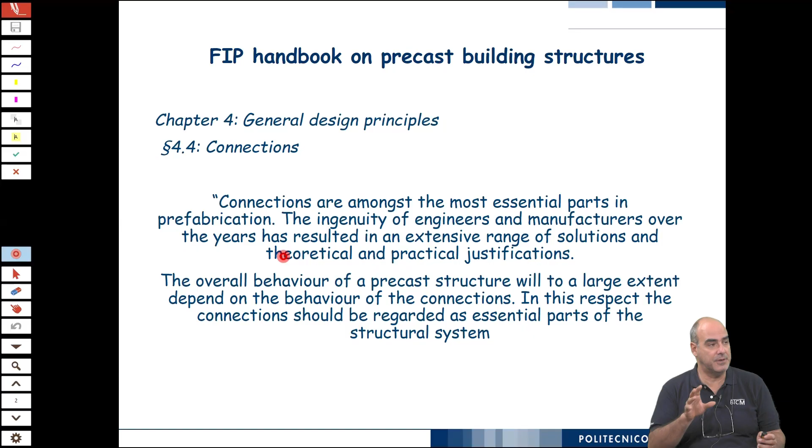The important thing is that the overall behavior of a precast structure, as you design it, depends on the effectiveness of implementing the assumptions in the transfer of forces between the elements through your connections.

So which are the functions of connections in precast building structures? First of all, they connect the units to the bearing structure: the slabs among themselves, the slab to the beams to the columns, the slabs to the cores or to the shear walls, and so on.

They secure and guarantee the intended behavior. So if we assume a diaphragm behavior of the floors, the connections have to guarantee it. If we assume a fixed edge at the bottom for the column, the connections have to guarantee it. And in order to do this, they have to transfer the forces from the point of application to the stabilizing structures.

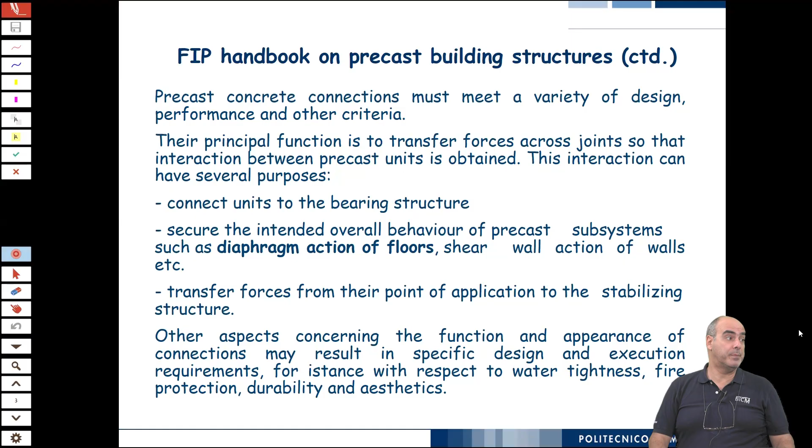Then you also have other aspects: function, so the connection must allow a deformation. Appearance - if you see a rusted connection, what are you feeling? That there is some kind of bad design, bad execution, whatever. Also water tightness - sometimes through joints the water seeps through. Fire protection, fire resistance, durability.

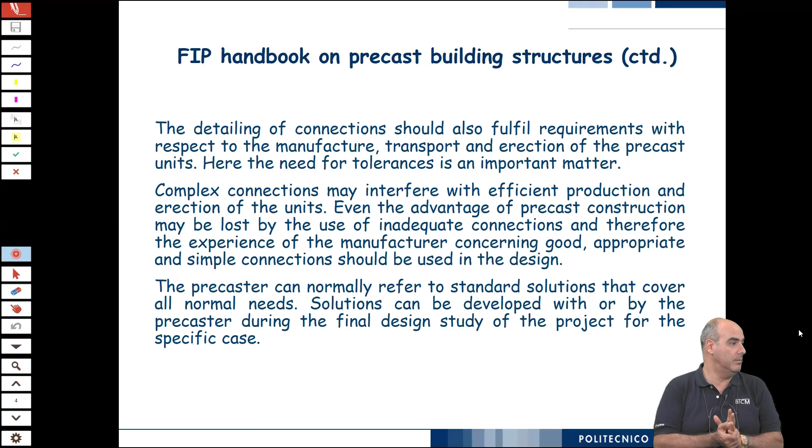One thing we have to take into account, and we will see some examples of very strange connections, is that connections must be manufactured and must then in some way be inserted or connected to the elements. For this reason they must be simple, also considering the tolerances.

But as we said yesterday, when we talk about connections, it's not only the piece of steel which joins two elements together. It's the complex mechanism of transfer of forces in the adjoining zones of the elements that you have to consider. So a connection, broadly speaking, consists of three parts: the connecting device and the two end zones of the elements - if there are two, can be even more - that are connected.

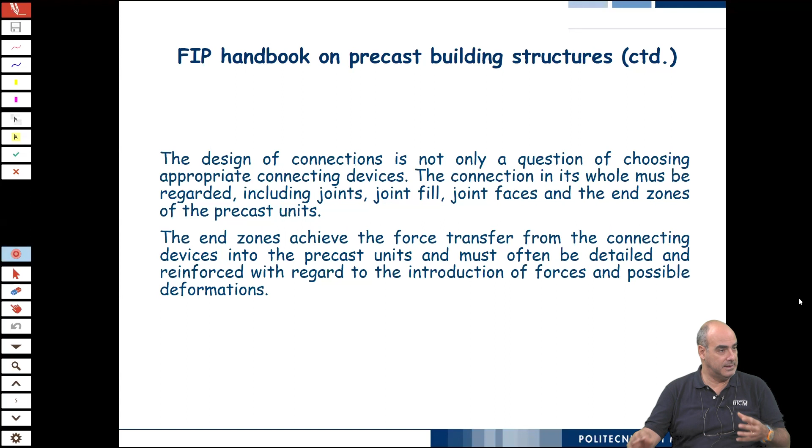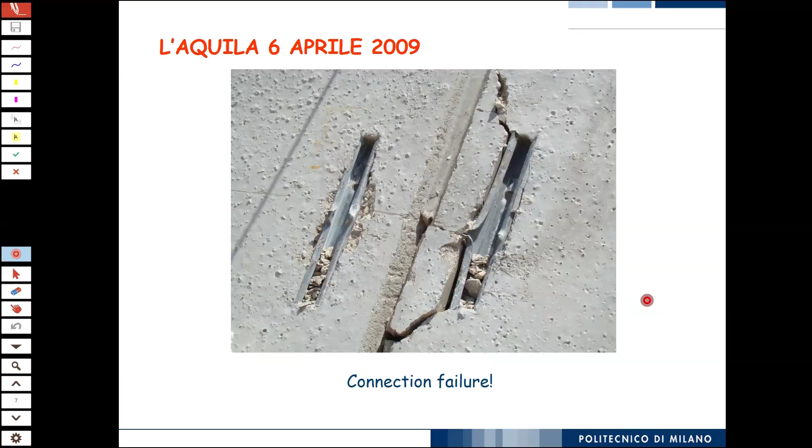You see that it was really torn up by this out-of-plane movement. These highlights show this other part of the connection, which went under tension and was broken because of the excessive demand. So this really highlights the importance of the connections.

Actually, where is this building? This building stood, and there was no issue with the behavior of the building itself. All the problem was in the connection. Luckily in this case, the damage was only economic, because you had to replace the panels and so on.

But can you imagine if that happened during the day, in what was like a warehouse, with forklifts bringing freight back and forth and people passing by? It could have been much worse. Here are some other images of the connections.

Generally the adjacent panels are not connected to each other. They are shaped with some kind of geometrical details and simply joined to each other. There is no connection between them. Because if you put a connection, that is a good question.

Thank you for asking. Connecting them gives a very strong stiffness contribution, as large as the wall itself. Whereas if you do not connect them, you allow the single panels to rock a little bit, which helps in controlling the response. Otherwise the structure becomes very stiff.

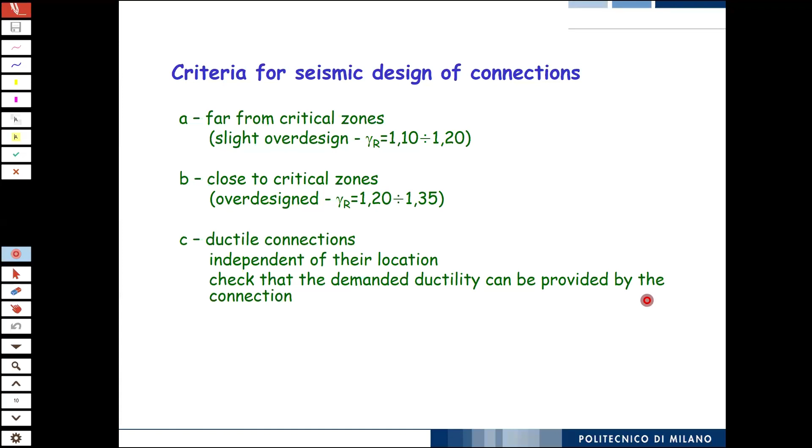Now, we have two philosophies for accomplishing this: wet joints, or emulative connections.

Design and construct your building structure in such a way that you restore a cast-in-place situation, not considering this. Then you have dry connections.

For teaching purposes, let's imagine a building to figure out how many types of connections I have, because each has to perform different functions. I can have the roof element or the floor elements, and I have to connect them mutually to each other. That's the first level of connections. Then I have to connect the floor or roof elements to the beams, to the columns.

If you have a multi-story building, it can happen that your column comes in segments. If you have a 20-meter high building, you don't cast a 20-meter high column—it would be unpractical to transport and to lift. So you cast in segments, and then you have to decide where to join them, and we have seen some examples: joints between the column and the foundations.

These are really the ones about which we know least: fastenings of cladding panels to the bearing structures. Why do we know least? Because we make the assumption that the cladding panels are non-structural. While we design for earthquake, we consider part of their mass participating in the earthquake motion, but we don't consider them in the overall behavior. And this is a big mistake. This is a big mistake.

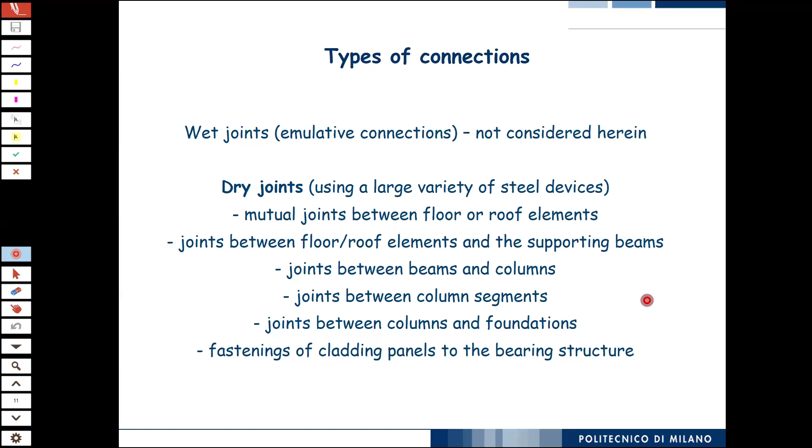But still, it's a topic of applied research—it's very important. So what is the function of these connections? Mutual joints between floor and roof elements: they secure the diaphragm action. When you have a diaphragm, you must guarantee, you must provide peripheral confinement.

It's easy in cast-in-place structures because you put reinforcement and you cast a peripheral beam. In precast structures, you do not have that, so everything is demanded to the connections.

Joints between beam and columns—these are also most delicate, because when we design our structure, we think of planar schemes. So we say, okay, what does a joint between a beam and the column have to do? It has to transmit vertical forces, and vertical forces you transmit by contact.

But when earthquake comes, lateral movement comes. So never rely upon contact and friction. Always provide a dowel. In the late 90s of last century in Turkey, Kocaeli, there was a strong earthquake.

In precast structures where there was no pin connection between the column and the beam, you could really see that the columns were standing and the beam collapsed because it lost its support, due to this motion. You can also have some jumping of the beam on the column, but at a certain point, because of this movement, the beam really loses its support. There was no cracking, no yielding of steel, nothing—the beam collapsed as a rigid body because it lost its support.

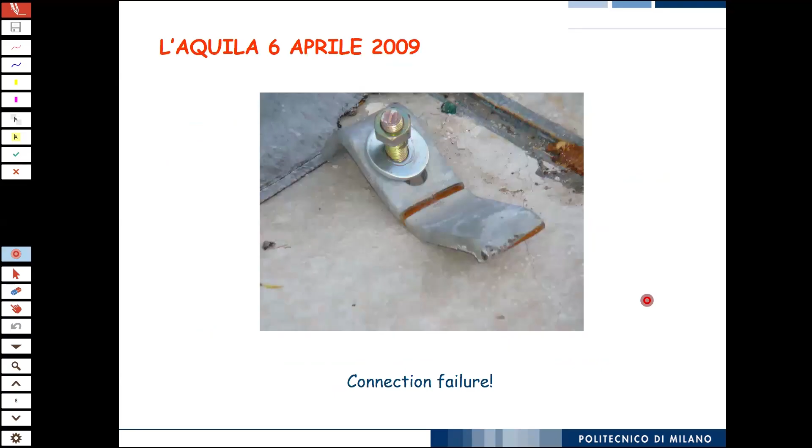Let's go back to this building. My panels do not participate in the earthquake response. What you have to allow is that your connection must permit a relative movement between the frames, which are quite flexible—you see how slender they are. This is also the benefit of precast structure, because they have a high period and so a lower inertial force. But if the frame has to behave as such, it will have large deformation.

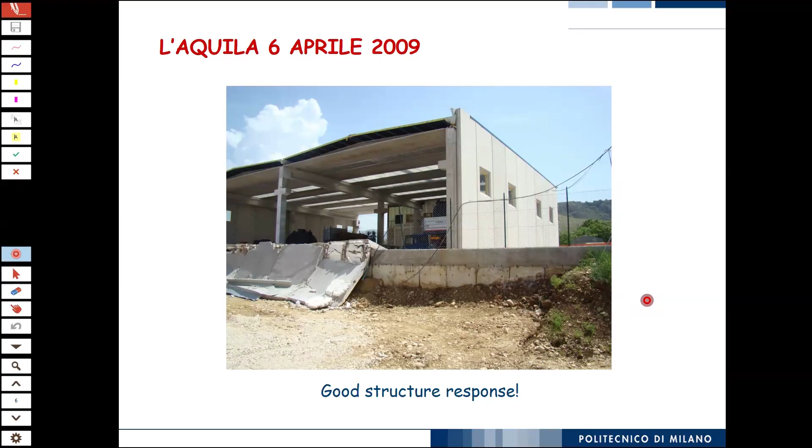So these connections have to allow the panel to stand and the frame to move. They have to allow strong relative movements, which is easy in this direction, but not so easy in this other direction, because in that case they have to function first as a tie and then as a pushback. That is also the technological challenge.

About the joints between beam and columns, there is another thing. As I was saying, we consider planar schemes, but in reality a structure is a 3D assembly. So you have to support the beam in its own plane, but you also have to avoid the beam tilting in the out-of-plane direction.

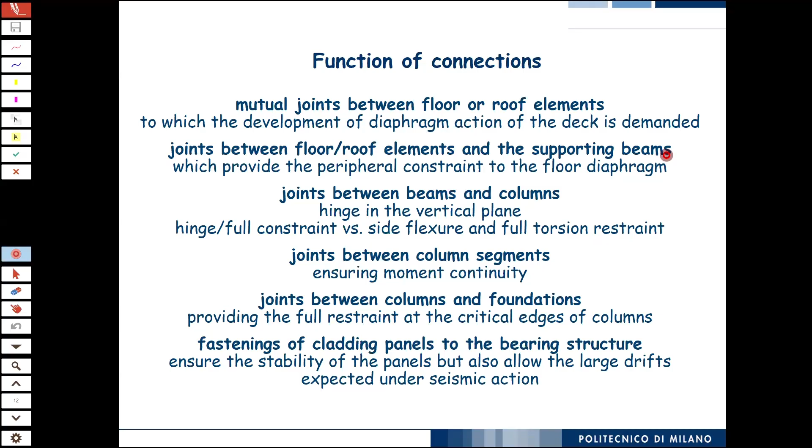So the hinge, if it is a hinge, must work in two directions. And it has also to provide some kind of torsional restraint, because this is something that you can expect. So these are some schemes of how the connections function.

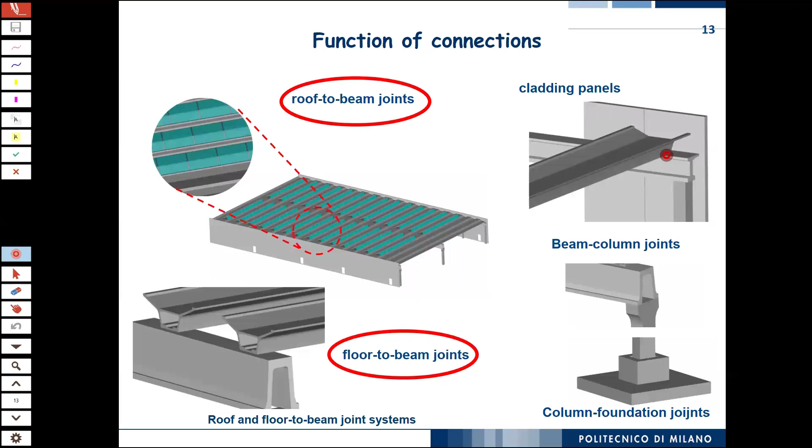But now we will see some examples. For example, let's start from the top: mutual joints between floor and roof elements.

These slides come from a survey that we made around 2010. We interviewed about 40 to 50 precasters in Italy and asked them, for these 6 types of connections, to give us a maximum number of examples of the most common devices that they use. We ended up with hundreds of them.

So there isn't a specific standard, and this work was intended also to say: there is a protocol for which you have to at least verify. The only thing is that you can design it. Then if you design simply by hand calculation, by finite element model, or by testing, there is no mandatory prescription, but we try to come up with a protocol, especially for seismic regions.

We prescribe 3 cycles at increasing amplitude and so on. But you see, this was a company which produced this kind of element. If you have your specific element, each company has its own signature one. You have to come up with a connection which actually can more or less work only for this.

You see, what did they do? Well, they used 2 bolts. Post-inserted, generally you leave a sleeve or a hole because it will be difficult, once installed on top of the building, to drill the hole. So you must leave the sleeve, you must pre-insert the sleeve, and then you put the bolt through the hole.

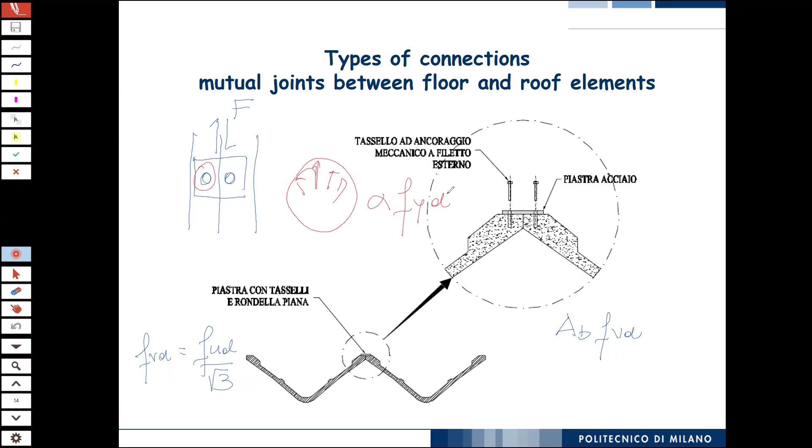So if I magnify this detail, you will have the hole, and you will have the bolt which pushes against it. Here the bearing capacity will be alpha times the yielding strength of the steel plate, times its diameter, times its thickness. Why alpha? Well, because the bolt pushes and you have a distribution of stresses which is like this.

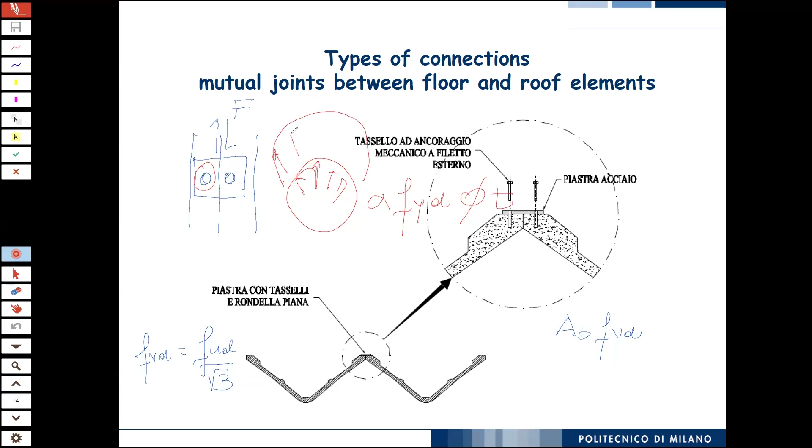When you arrive at the maximum, the other parts of this plastic area are still not fully developed, so you have to do some more work to fully plasticize. But these formulas come from the design of steel bolted joints.

There is another mechanism of transfer of forces that you have to check here. For the plate, yes, but it's not that determinant. There is another one that we have to consider.

Vertical, these are in-planar forces. No, but for this force here, just for the force that I drew there. Well, you have... where should it come from, the tension?

Yeah, but it's small. What is this bolt acting against? It's concrete. So if you look at this bolt here, well, on the other direction, but let's magnify. You have this one here. This is the stem of the bolt.

But you will have that concrete is reacting. So if the bolt is short, meaning less than 5 times the diameter, this is the discriminant length, you can assume that there is a uniform distribution of bearing stresses by the concrete.

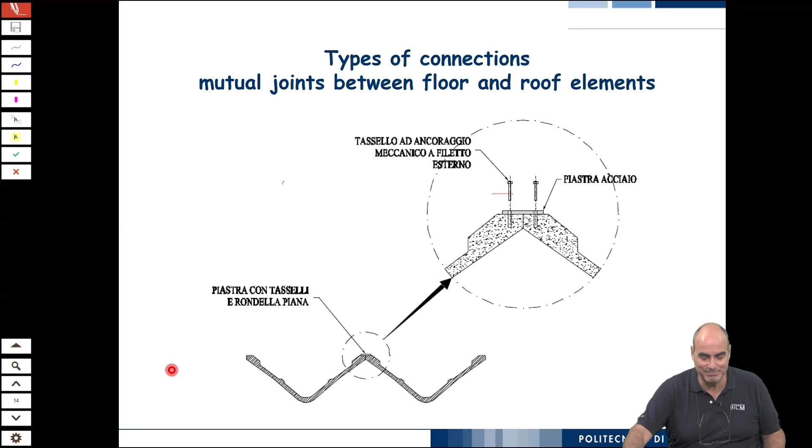We tried to do that, developing with the Association of Precast Industry a handbook for connections. But the issue was always that I'm considering this connection and I'm missing that one. And in some cases, if the connection is too complicated, it has a patent, so that is the difficulty. But it's generally an effort that should be done.

Now, this is a similar connection for double T elements, okay? You see what you do: you pre-insert, let me try to draw this. You pre-insert in the slabs of your element some steel profiles like this on one side and on the other, something like this.

Here, what you see, this one here, are actually like this. But if you look from the top, you see something like this. And generally, in this case, there are two bars which are anchored into the slab in that way.

Well, we have said we have to transmit a force, which is something like this. So why did we decide to put the bars in that way and not, for example, put just one bar, which is simpler?

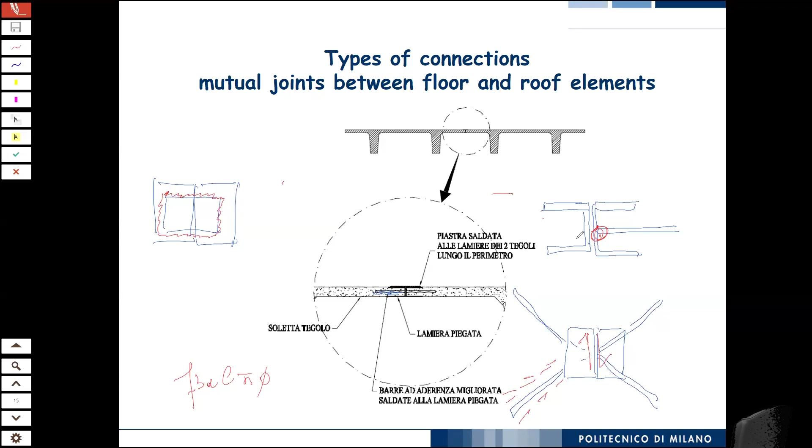Another thing—well, we understood why we need this diagonal reinforcement, but what would happen if I had used, I drew it from the top, a connection with a straight bar instead of the two inclined bars?

Yeah, the issue is that here we also have a mechanism of interaction between the bar which pushes against concrete. But generally, this development length that we need is higher than 5 times the diameter of the bar. There is a milestone paper by Elizabeth Vintzeleou and Theodosios Tassios who did a lot of work on this.

I think Tassios has now passed away—he should probably be around 100 years—but he was a fantastic guy, a Greek professor, very tall man with a beard, very imposing. He's really one of the fathers of the modern seismic design codes.

They worked especially on this milestone paper about dowel action in static and cyclic conditions, and they developed a very simple analogy. They said: okay, I have a force here.

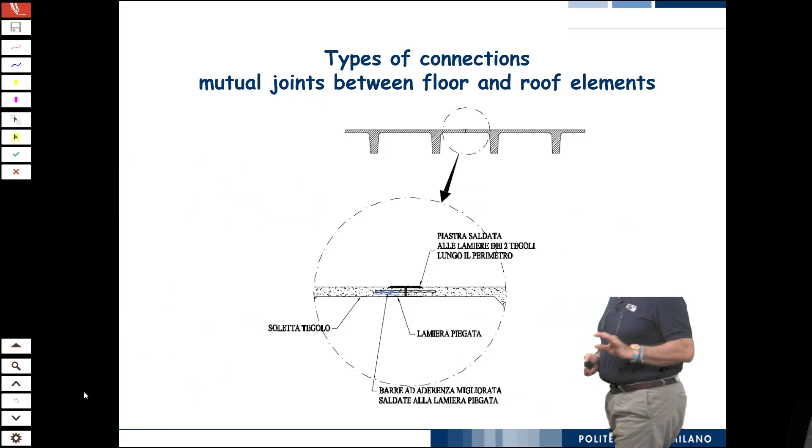If you go to a handbook of design of connections in steel structures, you find that you design bolted joints for the shear of the bolt, for the bearing capacity of the steel plate around. But you also prescribe minimum distances in the two directions. How are those minimum distances calculated? Because you don't want the tearing of the net cross section, the breakage, the torn-off of the cross section.

You want them to occur after the bearing capacity has been reached. So those distances that we respect automatically guarantee that the net cross section will not be torn off, and they are calculated with the capacity design principle. Simply saying, the resistance of the net cross section must be higher than the bearing capacity of the plate, so if anything happens, the lowest strength mechanism will occur.

So this is just to tell you, this is a field - I will not say interdisciplinary because it's mechanics - but it's a field where you have to bring expertise from different fields: structural mechanics, structural engineering, steel design, concrete design, fundamental mechanisms. Dowel action is one of the fundamental mechanisms of interaction between steel and concrete. The other one is bond. So these are the mechanisms through which you design the connections.

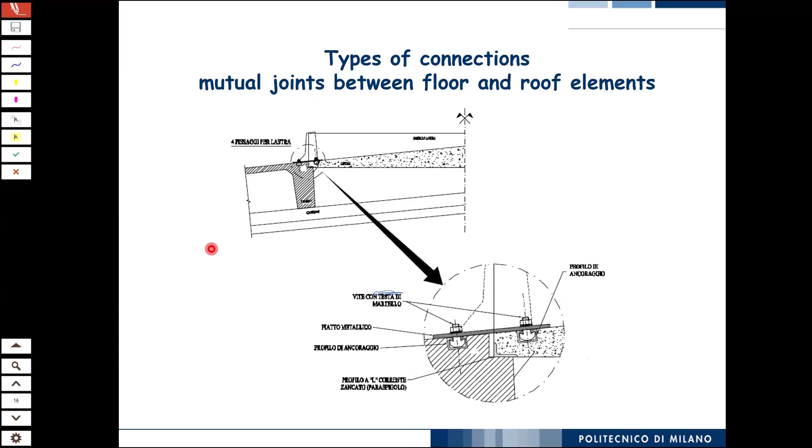Well, between roof elements and supporting beams, this is another very, very common device. You see, you have a double T element, and generally what do you do? Well, your bolt could be pre- or post-inserted. You come up with this U profiling steel, which you can also precast inside the element. And you have a hole here, through which after that you will have a bar passing - it's a bolt that you then tighten up.

And on the flanges of this element here you will have other holes through which you will bolt the connection to the concrete. In this case, generally these bolts here can be post-inserted - you can even go and drill something. Sometimes you can drill on the beam once you know where the position will be, so before, when the beam is on the ground at the construction site, you will go and drill the holes with your own sizes and so on.

But then be careful that the holes on these elements must not be circular, but slots, because you always have to accommodate for some tolerances. This, I have to say, was a connection detail we found everywhere - the most common one, the most adopted, the most simple, and I will say the most reliable. Then you can figure it out in different ways. In that case it was a U profile; in this case it's even easier - you just go with two steel angles, and you can easily post-install them, very, very easy and simple.

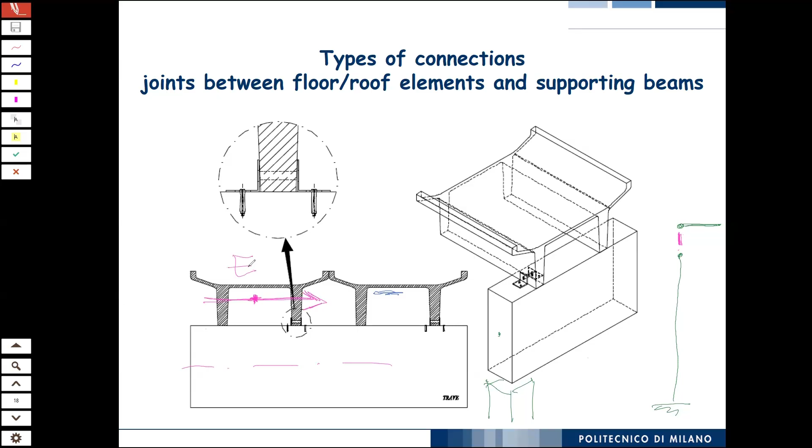And the same is here. You remember when we made the example, the centroid of this element is here. So with respect to the extrados of the beam, and most of all to the axis of the beam, there is a strong eccentricity. So you can imagine if an earthquake comes in this direction, the earthquake force is applied here. Before you transfer to the beam, you have to go through this, and there is also a tilting effect of that element, which you have to consider.

So the finite dimensions of precast elements, when it comes to structural analysis and also to the design of the connections, must be taken into account, because if you have a force applied here, the effect will not only be this, which is easy. The effect will also be that you have a tensile force here and a compressive force here, which have to equilibrate that tilting moment that you have to take into account. And out of plane forces as well.

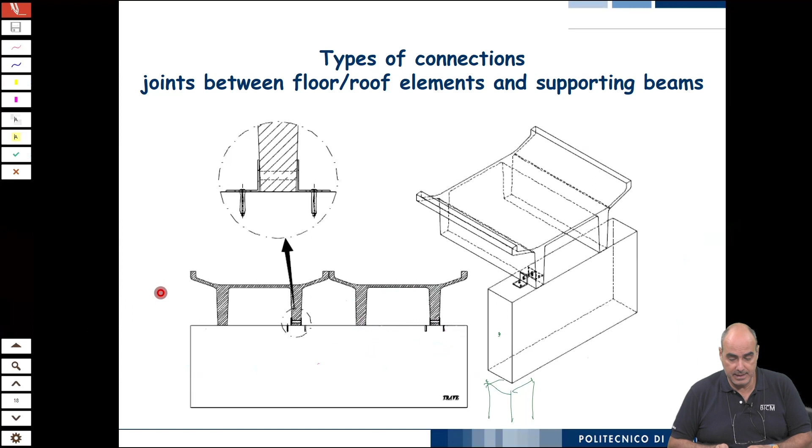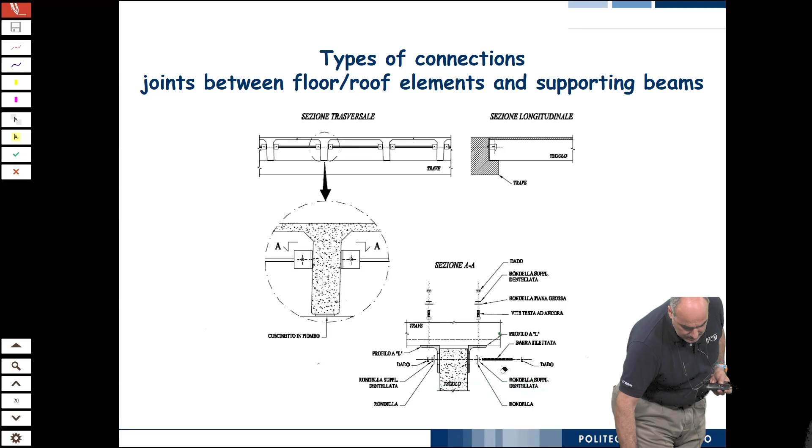So, to go back to the case we were examining before, this case here is meant to limit, in a sense, this piling up of eccentricities, because in this case you contain everything into this space. But the principle of designing this connection is exactly the same that we have seen before. It works exactly in the same way.

Well, other variants. In this case, the beam was not an I beam, it was this inverted channel beam, and you sit the element here. So in this case, it was not anchored from the bottom, it was from the top. It was anchored from top. See here the slotted hole, which serves to accommodate the tolerances.

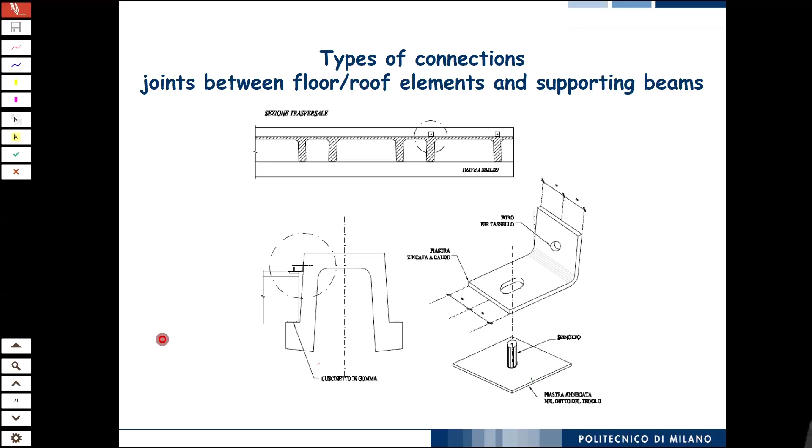Now here is another example of a connection which works only for this kind of element. This is an element with a wing shape, but at its edges it has something like a stiffening beam, we could say. This has a structural purpose because it serves to convey down the forces, but also a functional purpose, because this element generally has some slope given to it, to let the rainwater drain.

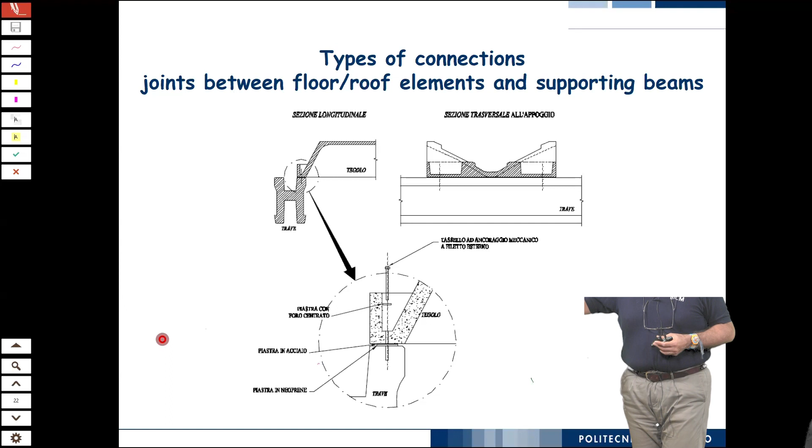So then you collect it here in a channel, put some pipes, give slope to that pipe, and drain the water out. Otherwise, with these elements, there's a risk of forming ponds and patches of water that stay there. You have waterproofing, but waterproofing is UV ray sensitive, so after a while there is degradation and the water starts leaking through, and you have durability issues.

So how did they solve the problem of connections here? Well, you have this solid piece of concrete here, just drill a hole and have an anchor bolt go through there.

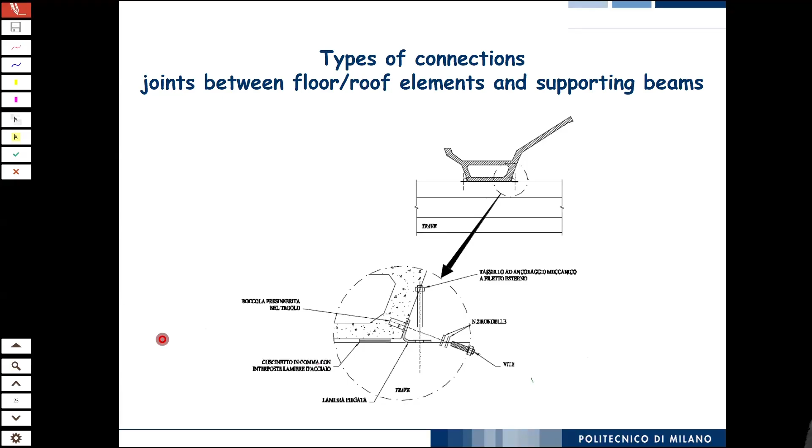This is another, rather creative connection, because you had this skew symmetric, like a seagull profile or whatever, and they connected. Still, you see, this is still a steel plate, steel angle, which was connected through bolts, through anchor bolts, to both concrete elements.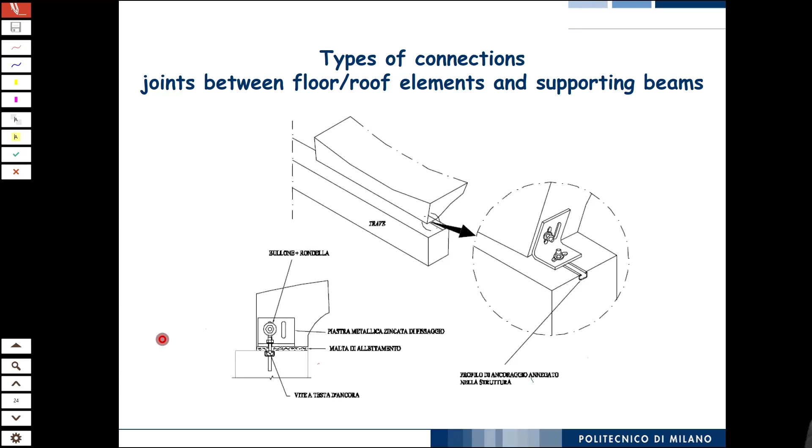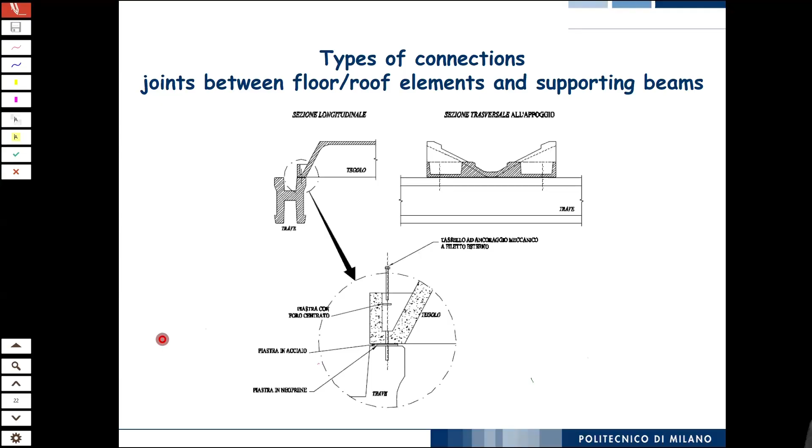This requires a lot of precision, as in this case, you see, you have slotted holes, you have two holes to accommodate, you have this rail to accommodate that. So this was the difficulty that we faced to end up with standardization, because this connection here was easily standardizable. But we also realized that these connections were there, and they required some specific issues. Other similar cases, similar elements.

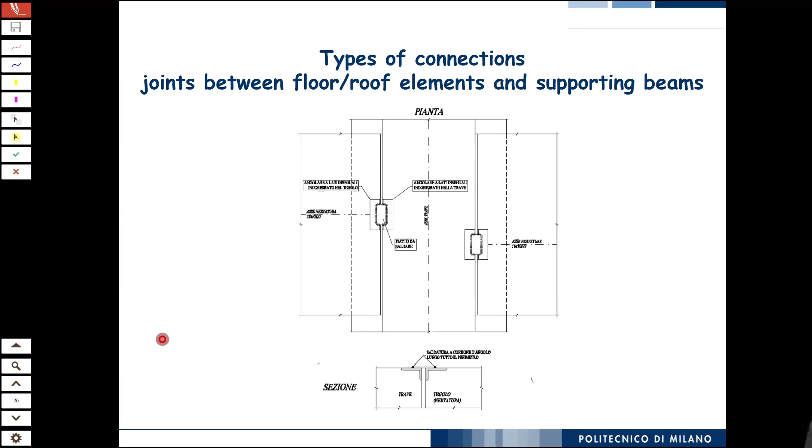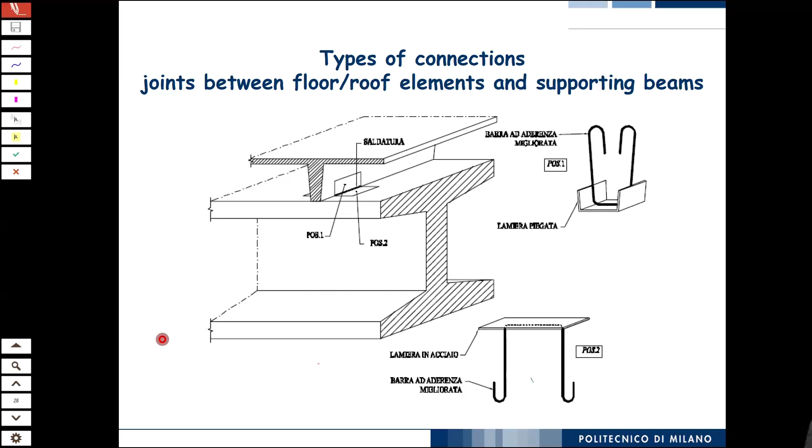You see, this is an image of the connections with the plates and so on. This is the upper plate, and you see these dashed parts, which are the welding that you use to complete it. Other cases, this is a little bit more complicated, but it is based on the fact that you transfer through these platens the forces to some hooks, to some bars, and so on.

Connection between beam and column. This is the standard one, the most easy one. Well, you have your beam, which can come in different shapes. This is an I beam, this is an L beam, and so on. And this is the beam, this is the column. You have holes inserted in the beam. You have to preform them.

In your column, you can either have holes in which you insert then the bolt, or you can have the bars coming out. You have both options. Well, if you have holes where you insert in, you have to consider that you have then to complete with some filling, anti-shrinkage mortar, and so on.

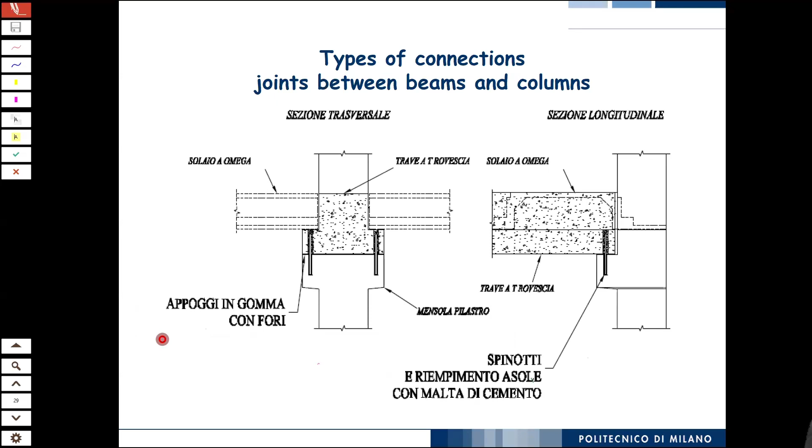No. This is the column, this is the beam, and these are the two elements coming. So there is no continuity. You can introduce a little continuity if you have some topping here and you provide some negative bending moment reinforcement. That will be very thin because the topping is maximum 5 centimeters.

This is an example that we put here as some kind of bad connection. Don't do this, please, because you see, you have these very, very long bars which have to pass through all the depth of the beam cross section. But the interesting thing, the reason we wanted to keep this in the survey, is that you provide restraints against the bending and the torsion in this direction.

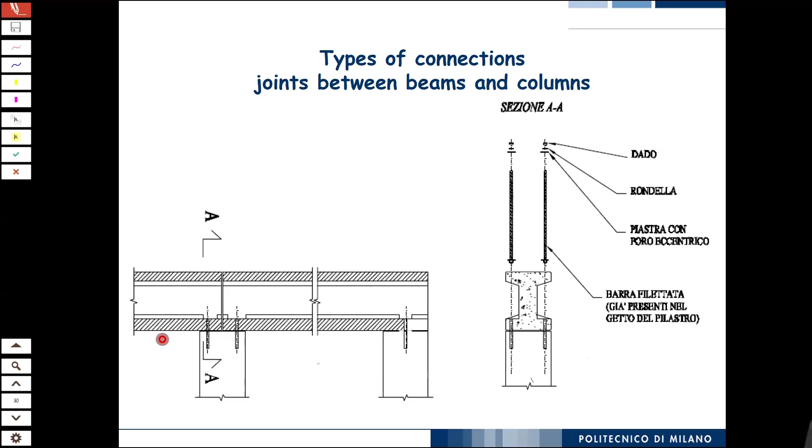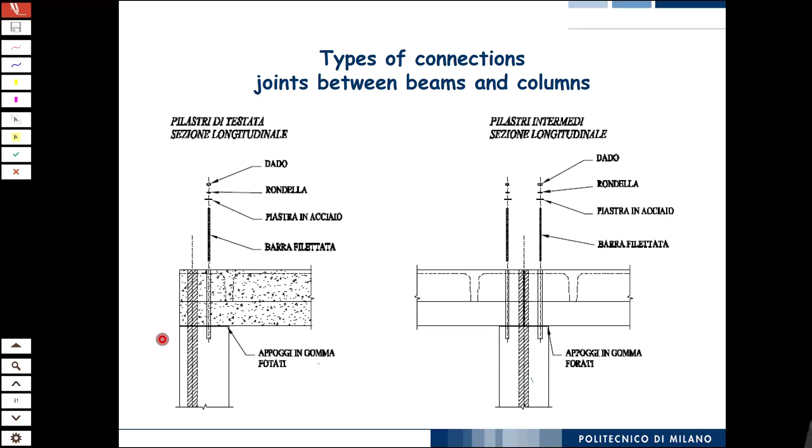Well, these are some other elements, some other ways in which the same connection was realized, but generally the principle is you have a bar either coming up from the column or that you post-insert in preformed holes. I'm sorry that here the captions are in Italian, but here you always have a neoprene pad.

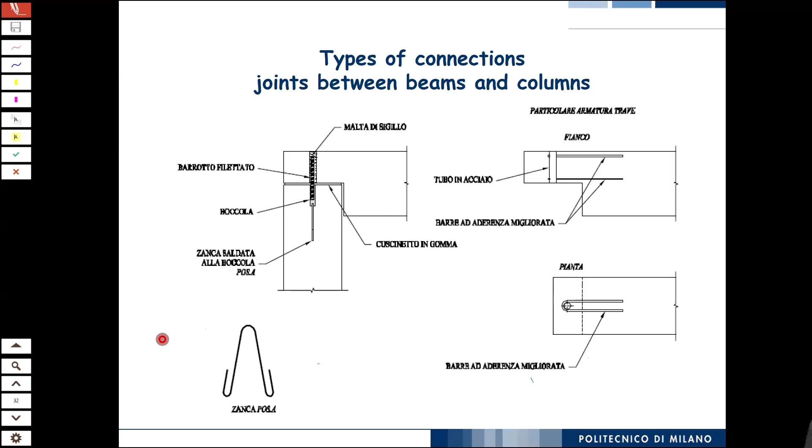We realized through tests on full-scale precast buildings that in seismic regions, it has to be at least 1 centimeter thick, because the relative deformations which are required can really compress the neoprene pad. So if it's thinner than 10 millimeters, thinner than 1 centimeter, it can quickly squeeze and degrade.

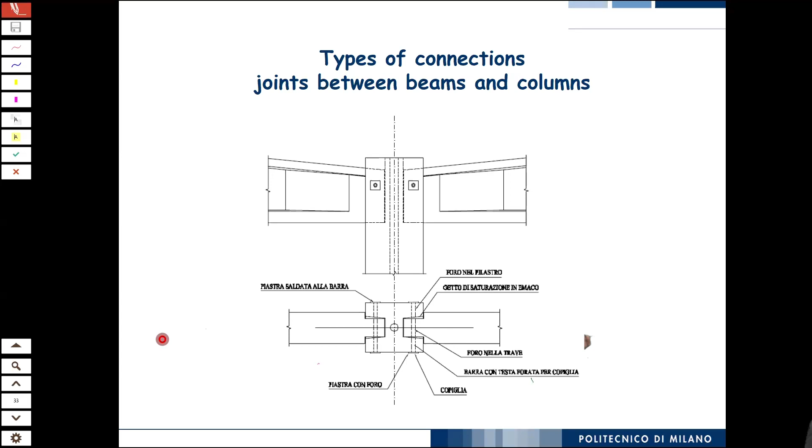This is another typical connection which was used especially for the double-pitched beams. The column is shaped in the form of an H, so it has two pockets on the top. And in those two pockets, you accommodate the beam, and you provide a bar which threads through.

Well, let's try to see, for example, in this case, which are the mechanisms of force transfer. Well, surely you have transfer of forces here against the concrete here, and here, through the beam and through the column.

And, well, they can be compressive, which does not cause any problem, but they can be tensile as well. So the weak point, for example, will be the tensile resistance of a cross section like this. So you have to provide enough reinforcement there to resist this tensile force.

If you have an out of plane moment, what will this out of plane moment induce? You see, look here. Actually, I was a very bad student in drawing, but if we try to see it in 3D, you see something like that.

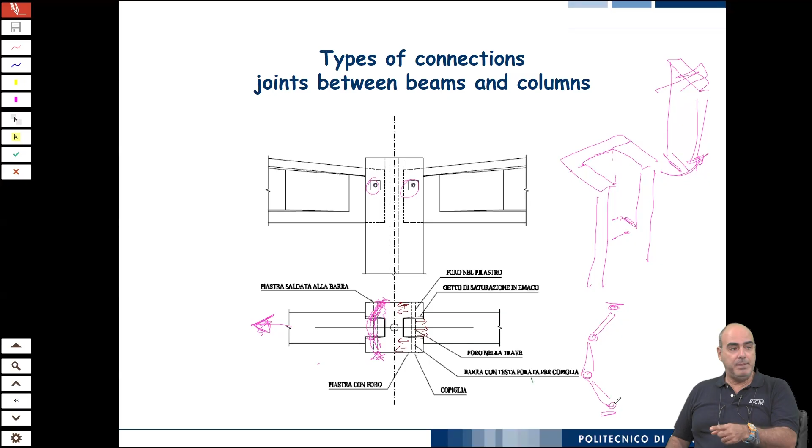Actually, this mechanism of failure of bolted joints is typical of bolted joints in timber structures. Because while in steel structures we have the bolt connecting thin plates of steel elements, in timber structures the width of a timber beam is 20, 30 centimeters. So this rope mechanism is exactly the same as we find in similar bolted joints in timber structures. So once more, you see how other parts of the discipline come into this.

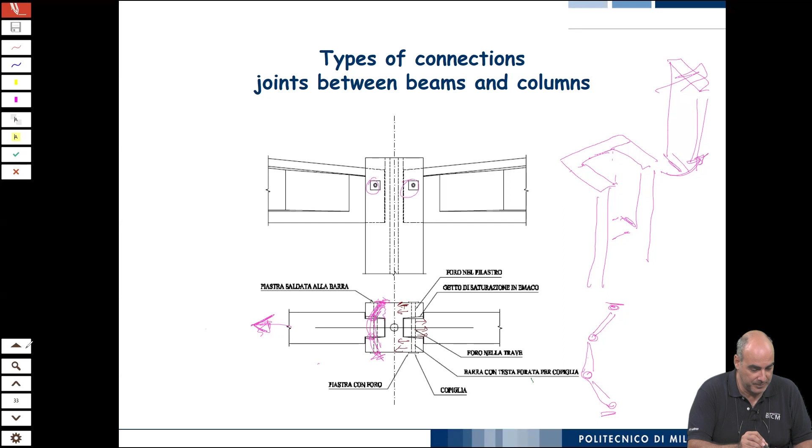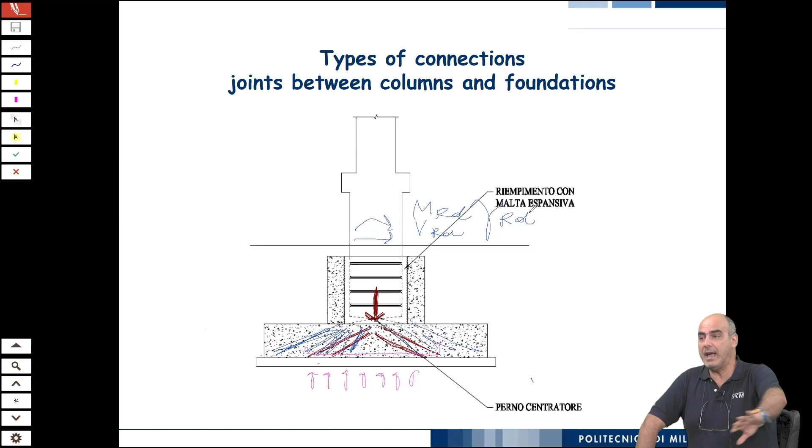And then in some cases in the code, it's also written that when you design foundations, forget all the ductility possibilities to reduce the forces. Because when we design a building for earthquake, we have what we call a behavior factor, which accounts for the ductility of the structure and allows us to reduce the design forces. In the codes, somewhere, and now people start saying this can become unpractical, it's written that when you design the foundations, forget all those ductility coefficients. So you design as if the building is perfectly rigid and linear elastic. So the forces on the foundation are huge, huge.

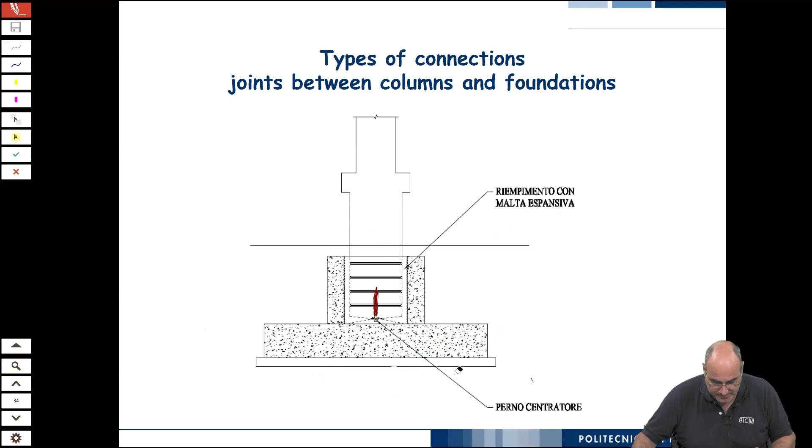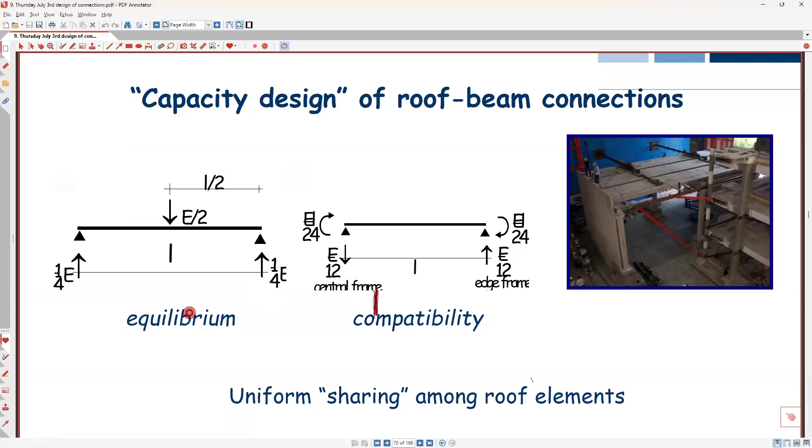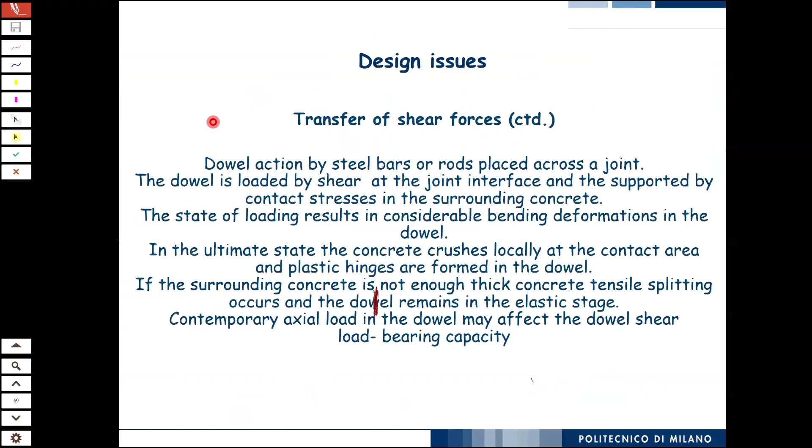But think if in a real precast building you have to transport hundreds of columns, not 6. So you need the number of columns divided by 2 to transport that. So the design of this kind of foundation element has become unpractical, and this is the reason for which, let's go back to screen, another type of column-to-foundation connection has been designed, and it's now quite popular on the market.

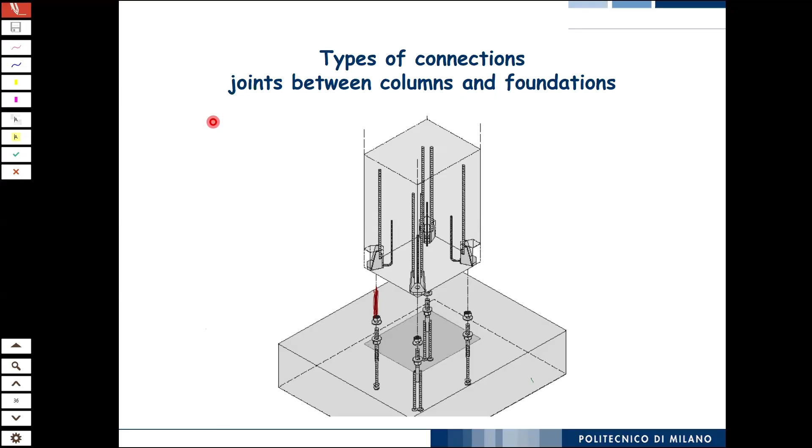You see, you have this foundation slab. Generally nowadays the slabs are cast in place, you go there and you cast your foundation slab. And you put these bars waiting, and the column is equipped with this kind of, it's called column shoes, and it has this bar and this tail bar for the transfer of the forces. So how does it work? Well, this is the foundation slab with the waiting reinforcement. Then you position your column, but here you still must hold it in place because it's still not connected, it's not safe. Then you pour anti-shrinkage mortar, and when it has set, you can release your column.

Peikko, yeah, these are... well, the one that I think we worked with in Italy, but that was more than 15 years ago. I don't remember whether it was Halfen or something like that, but now they are called Leviat. Leviat has branches in the Middle East as well, I think, yeah. Also in India? Yeah, okay.

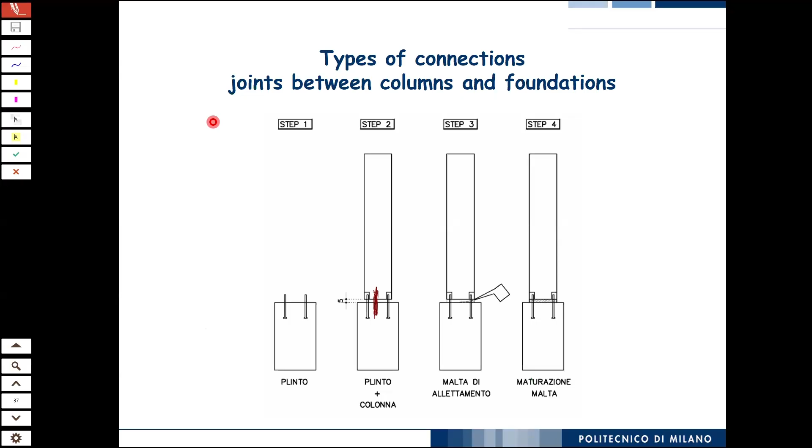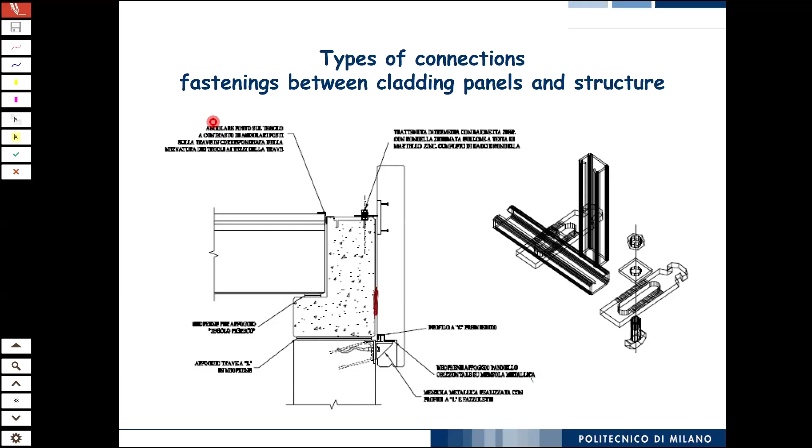This is actually one of the most difficult connections to calculate, because it's hard to understand the transfer of the forces. This is one of the connections where you accept the design by testing: you do the tests, analyze the results, make a reliability analysis, and determine the maximum force they can withstand.

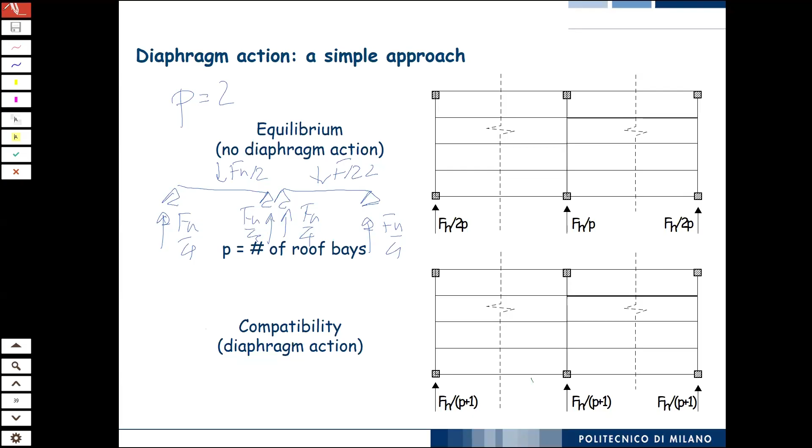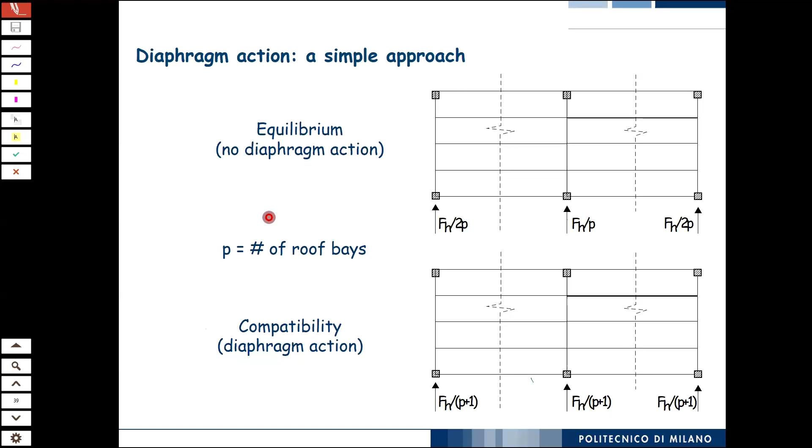So you have to guarantee that the part of the force which, by equilibrium, tends to go to the inner frames is redistributed to the outer ones—you download the central frame and overload the lateral ones. That's the principle explained in a very simple force-wise fashion. What does this result in? It results in an in-plane bending action.

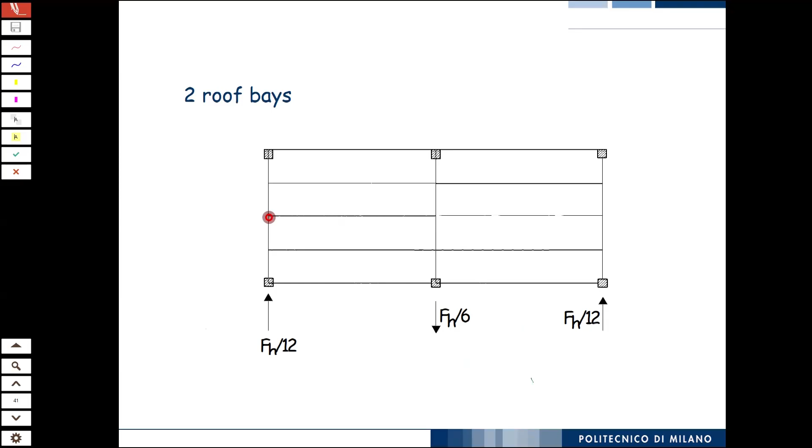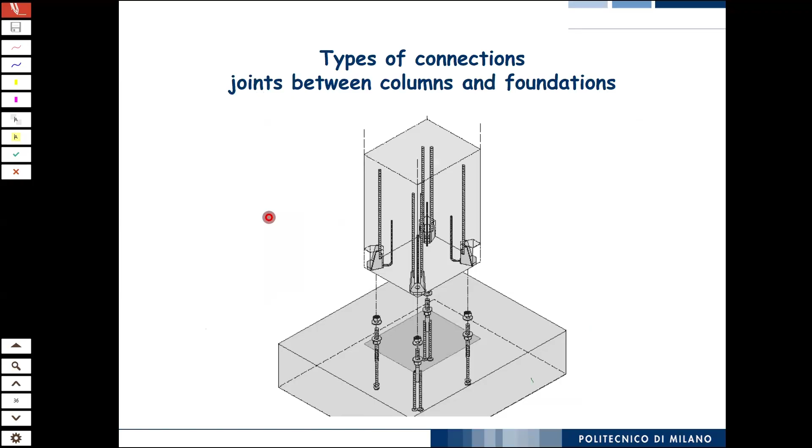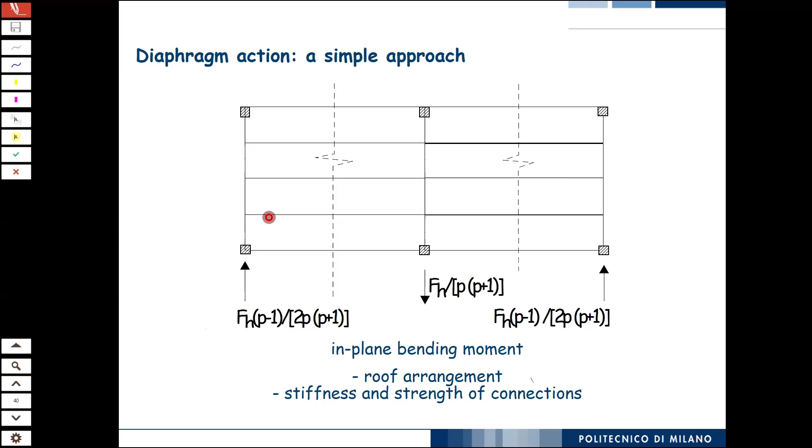If you have a continuous cast-in-place concrete roof deck, this action is taken by membrane forces in the slab. But if you don't, as in the case of two roof bays, the force has to be taken by the connections. That's exactly what happens: this force Q here is the transfer of forces from the central bay to the outer ones.

Now you can have different cases. In the best case, you have the roof elements joined to each other and connected, so these forces are taken by the connections between the two roof elements—as we've seen before, those connections with the V-shaped bars, for example.

How do you calculate this force? Well, it's a very simple equilibrium model. You could say this is my diaphragm action force, which I apply because of stiffness in the middle of the roof element. So Q times this lever arm L half must be equilibrated by the forces along the connection. You have the number of connections, and you can easily do that. These forces have a lever arm, which is the width of the slab. So once more, it's a quite simple, mechanistic model.

You also have these reaction forces, but this is the effect I was telling you before. The inertia force is applied at the level of the centroid. These reaction forces are at the bottom. So together with this, if the force is like this, it will be tensile on this side and compressive on this side. You have to consider that as well. So this force S, which comes from diaphragm action, is the one for which you are going to design that connection that we have seen before.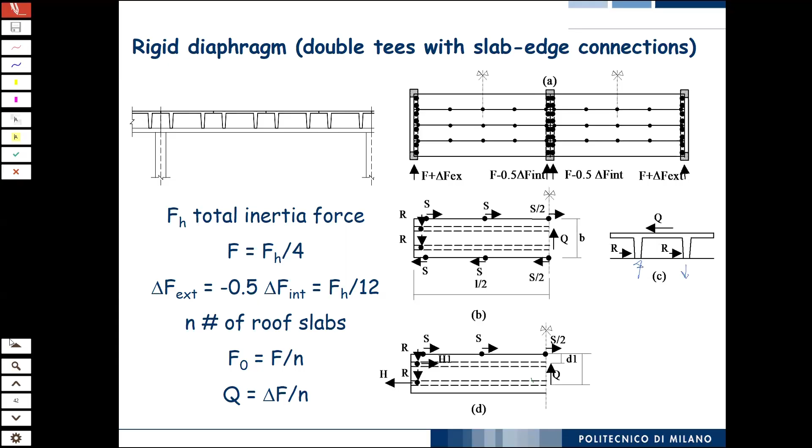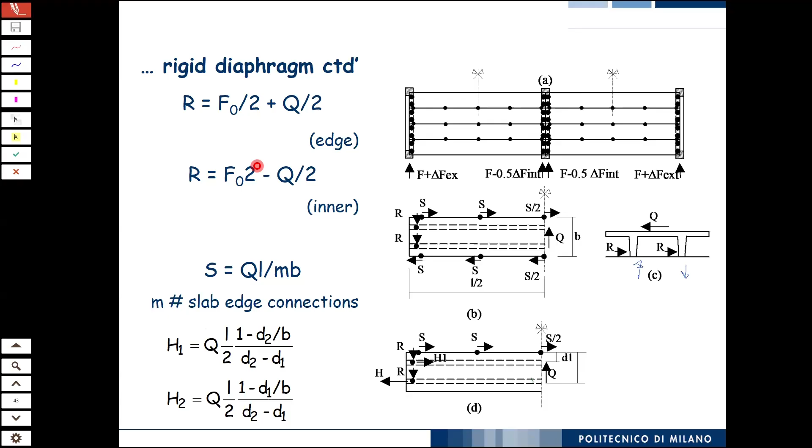A particular case is the edge element, because where the inner element has these forces on both sides, the edge element has these forces only on one side. Who provides the remaining equilibrium contribution? You need to have forces on the connections, not only in this direction, but also in the other one. You can easily derive these formulas by writing the equilibrium of rigid bodies. A connection here will be subjected to a force in this direction, to a force in this direction, and to a vertical force. So you have to consider this multi-directional stress state.

Now let's make it a little bit more complicated. What if your elements are not connected, but they are spaced? Who can guarantee the diaphragm action, that some force from the middle bay will go out? It will only be the connections at the bottom. So what you have to guarantee is an in-plane bending moment. This is a scheme looking at your deck from the top, so these are in-plane bending moments. How do you guarantee those in-plane bending moments? You guarantee them through these forces parallel to the stems of your pi element.

What does this also imply? That if you have a roof element which is made not with this kind of elements, but with elements like this, which will have only a point-wise connection, it will be very hard for you to guarantee diaphragm action. Because here you are able to guarantee the diaphragm action because you have on the same element two stems, so the forces can be in one direction in one stem and opposite direction in the other. You create the in-plane bending moment. How can you create an in-plane bending moment with only one stem?

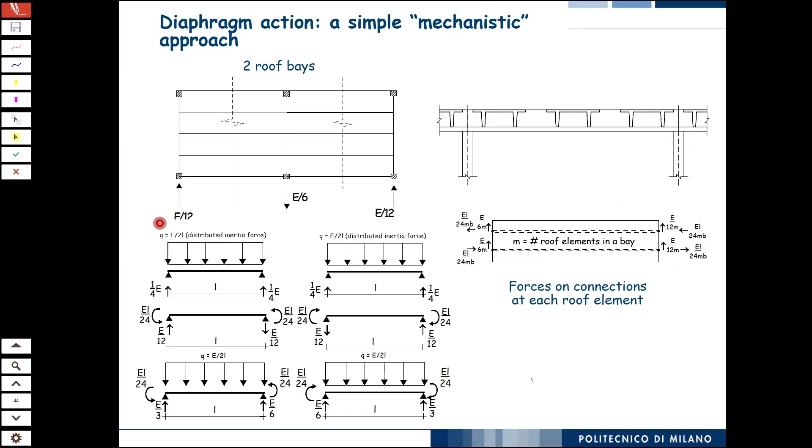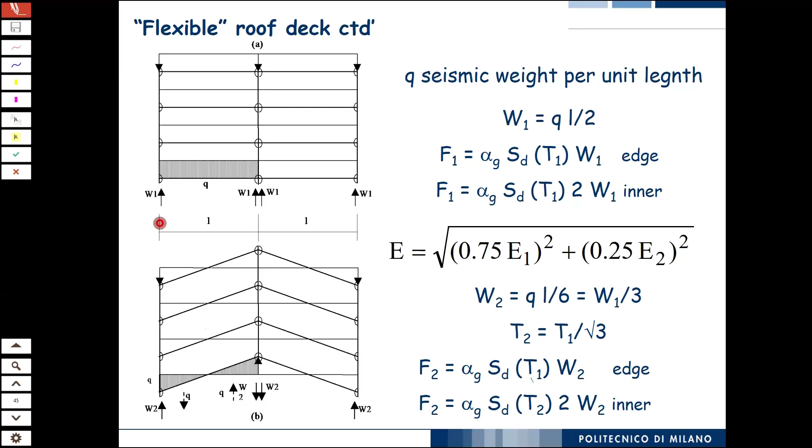And so typically, what happens with strongly disconnected elements is that if you perform your modal analysis, you have a mode in which all the frames are in phase, but you also have a mode in which the frames are in phase opposition. Here you really have to rely upon a modal analysis which you perform with a software. So these are very simple ways to calculate the forces in the connection.

Now, just to quickly go through, those were forces on the connections between the roof elements, and between roof elements and beams. Now we go to the connections between the beams and the columns. Apparently these are the same scheme. What is the difference?

Those two schemes, are they different or are they the same? Who thinks they are the same? Raise up your hands. So I assume that if I ask who thinks they are different, everybody will raise their hands. Where is the difference? Yeah, this is the extra D.

This comes from the fact that these two schemes represent the same structure. But in one case, this is the column and this is the beam, so this is the direction. And so you can say, I have a force here, but because of the high rigidity, I can transfer it here.

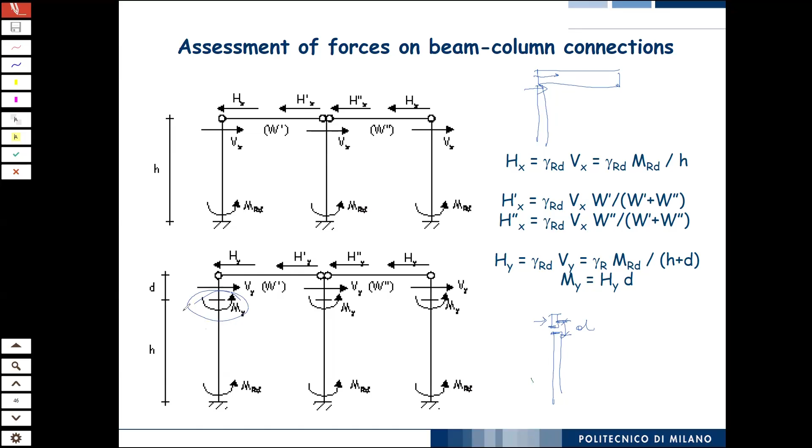The other scheme represents the frame in the other direction. So if you have a force here, you have to consider that there is this distance d. And so the connection between the beam and the column in the out-of-plane direction must be designed also for a bending moment, not simply for a force. So this is what we have to be careful of.

Well, this is the easiest way. If we have a multi-story building and we have a column which comes into pieces, we have to guarantee the continuity. So for earthquake loading, you expect something like this. So at different levels, you can calculate your force.

But going back, I think it was your second day lecture, where are these connections among multi-story columns made? Well, generally they are positioned, for example, at mid-depth here. And why at mid-depth?

Yes, because for gravity loadings, the diagram of the bending moment, except on the uppermost column, but in the other columns, has a zero point close to the mid-depth of the column. So you put the connection where, for gravity loadings, which are the permanent ones, the ones that the structure withstands 100% of its life, there is no moment. And then for earthquake, which is an accidental design situation, you will design the connection with adequate overstrength coefficient and so on, so that it withstands the required moment transfer capacity.

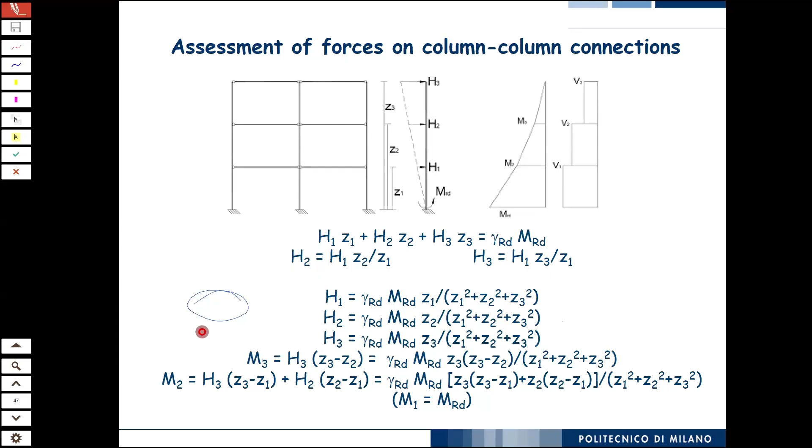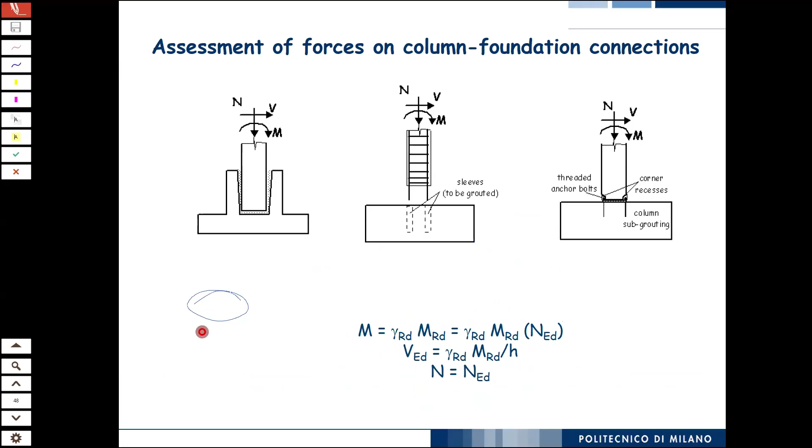And this is, you know, schemes of the design of the foundation elements. As we said, we design for a bending moment and the shear force, which are not the ones coming from the analysis, but are related to the strength of the column. And we apply an overstrength coefficient.

Yeah, we can do this, and then we will see the example in case tomorrow. So actually, how do we design a connection? Well, as we have seen also here, we have mainly focused, when I said the design, on the design of the connector. But now we have to understand how the forces are transferred in the adjoining elements.

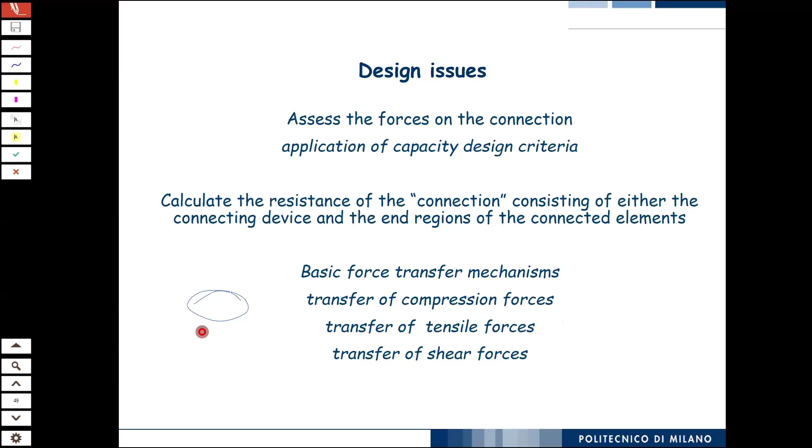So basically, we have compression, tensile, and shear forces. This is the way we transfer them. Compression forces are transferred either by direct contact, by mortar pads, or by other types of bearing elements. Avoid direct contact. Well, mortar or microconcrete is used to level irregularities, and these are the normal thicknesses of the joints that you can have.

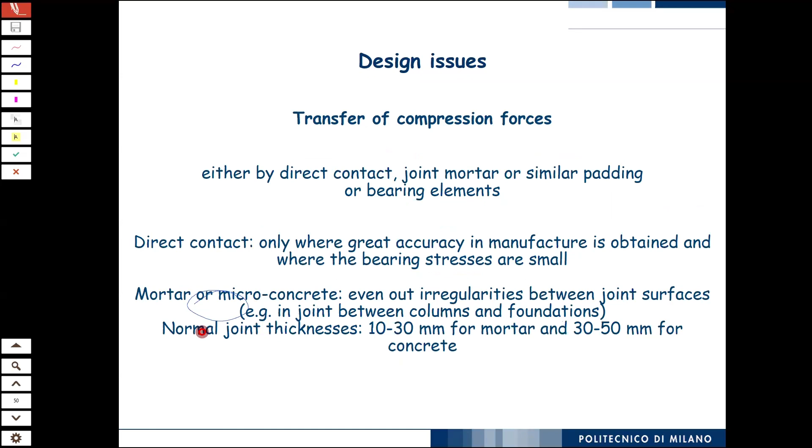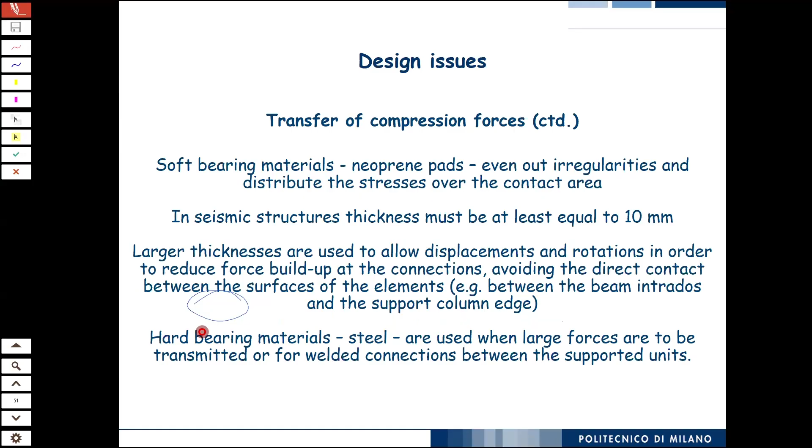Soft bearing materials accommodate irregularity, to smear out, to smooth the distribution of the stresses. Minimum thickness of soft bearing pads equal to 10 millimeters. Hard materials can be used. You can find some steel pads as well for specific requirements.

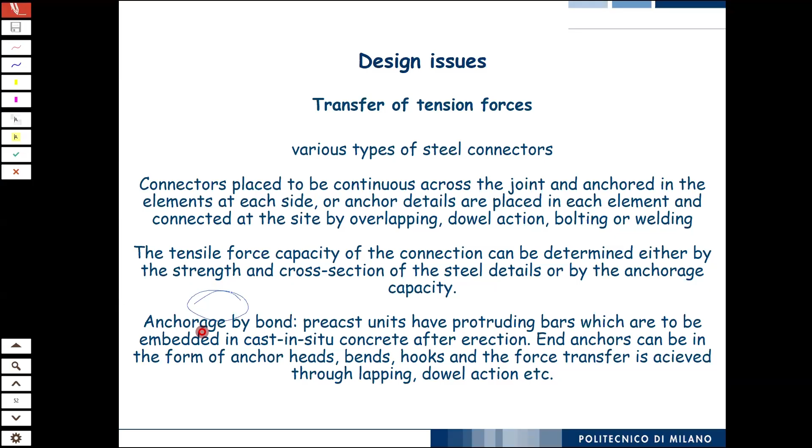Tensile forces - we have seen a variety of steel connectors. Anchorage by bond, that is the main thing. Since you want that connector to yield, you have to provide adequate bond length. That is essential. And well, you can use bolts, you can use welds, and so on.

And transfer of forces - well, bond between steel and concrete, friction along interfaces. In some cases, you can have interlocking by shear keys. For example, in hollow core slabs...

One common mechanism of transfer of shear forces was through shear keys like this. So you have in your elements some pockets like this, and you could have also some reinforcement coming out here, and you transfer the shear forces through a strut and tie mechanism. This is the strut, these are the ties.

And you can reverse it because when it's cyclic, you reverse it, allowing for the contrast forces which could be developed. These are empty pockets. When you join elements, you have to complete with the cast in place. Some people, besides the bar, also use fibers because they allow for better distribution of forces.

Okay, I think that we ended up with the fundamentals today.

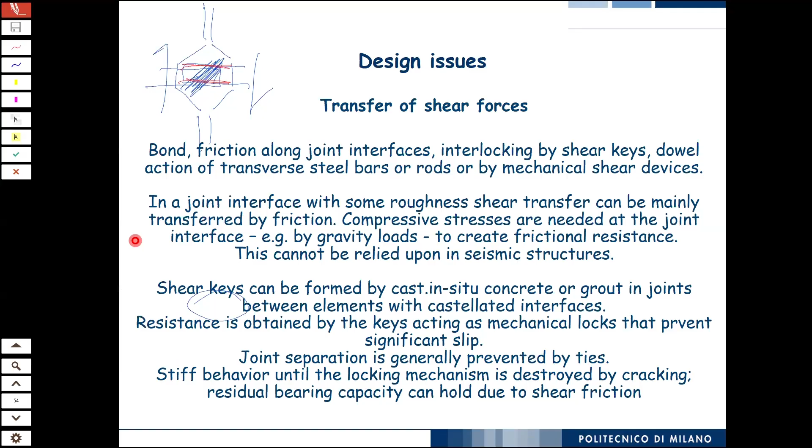Yeah, that's true. In Italy, there was also another thing. Since we have to cover this joint, I have some examples there. I don't know whether tomorrow we will have time. There was the development - we put there some energy dissipating devices to help through the friction to do that.